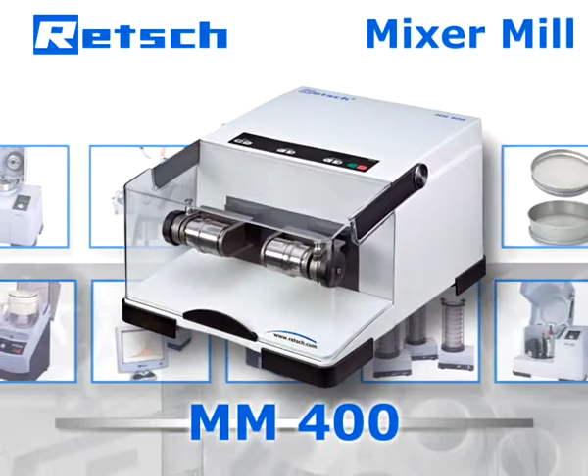Retsch's product philosophy is based on a quote by Aristotle: "The whole is greater than the sum of its parts." Therefore, our R&D department does not simply choose high-quality components, but also pays full attention to the perfection of their interaction. It is this approach which determines Retsch's products to be superior and makes the new Mixer Mill MM 400 the optimal device for the preparation of small quantities.

Due to its universal character, the MM 400 is used for a great variety of applications in biology, chemistry, pharmaceuticals, environment, ceramics, and mineralogy. It performs fine and ultrafine grinding of not only hard, medium-hard, and brittle samples such as alloys, bones, and glass, but also elastic and fibrous ones like plastics and hair. The mill is ideally suited for disrupting biological material for the isolation of DNA and RNA.

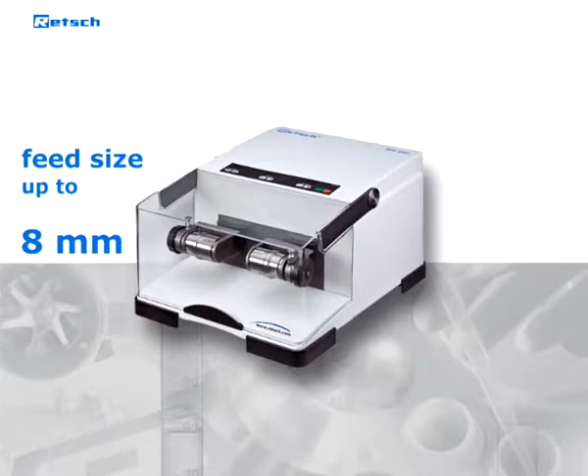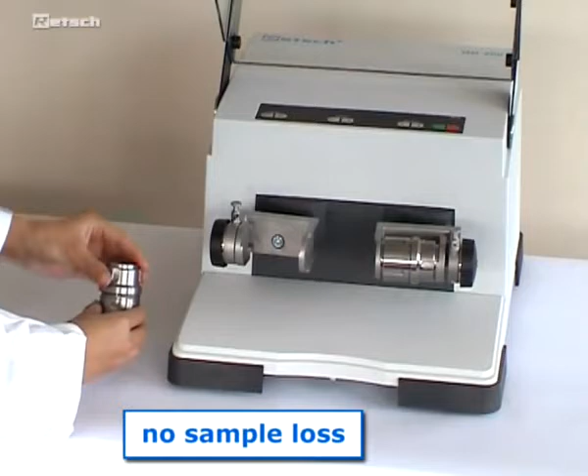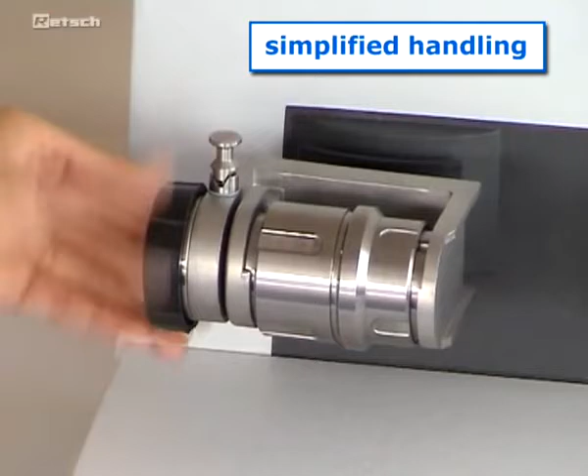With a maximum feed size of up to 8 millimeters, a grind size of down to 5 microns can be realized. The screw-top design of the grinding jars prevents leaks so that even wet comminution can be executed simply and without any sample loss. Defined positioning of the grinding jars in the clamp with automatic centering ensures a maximum degree of reproducibility. The optimized self-locking clamping device simplifies handling of the jars and supports the safety aspect of this device significantly. 2 grinding stations for jars up to 50 milliliters allow high sample throughput.

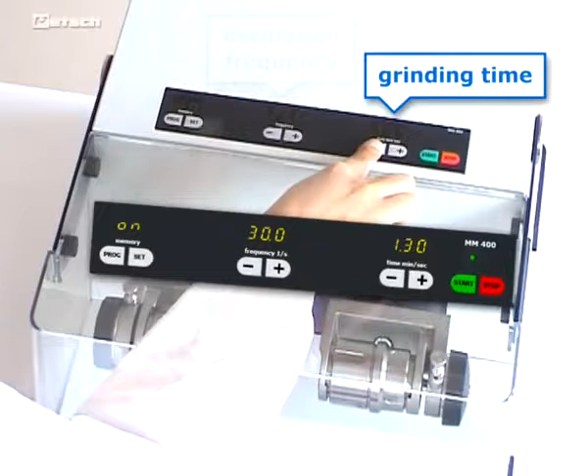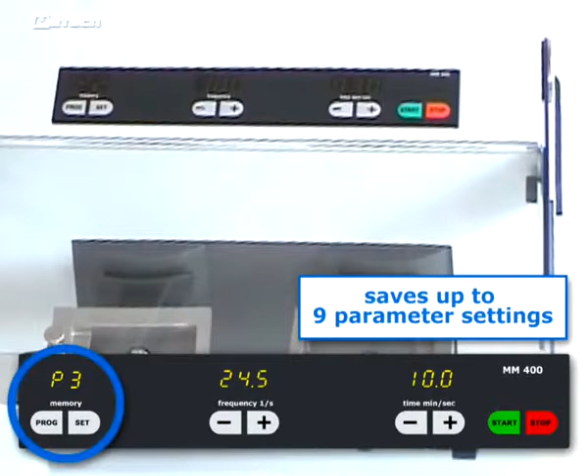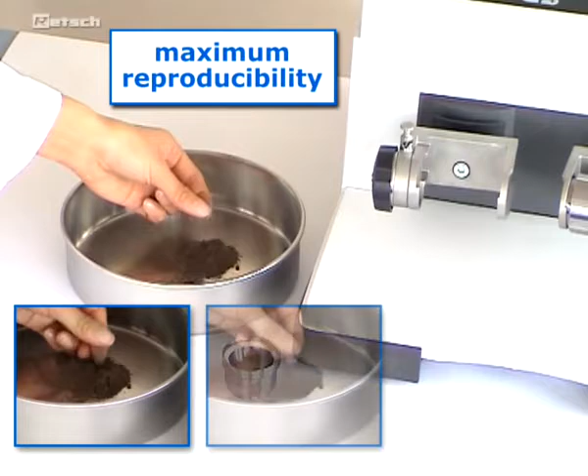The grinding time, as well as the oscillation frequency of up to 30 Hz, can be pre-selected digitally and precisely. An electronic speed control keeps the vibration constant during the entire grinding process. The user has the option to save up to 9 parameter settings, which offer ultimate convenience in routine testing of various samples. During the grinding process, the parameters are then safe from any accidental changes. At the same time, this guarantees maximum reproducibility of the sample preparation process.

After starting the machine, the sample containers perform radial oscillations in a horizontal position. Thus, the material is hit alternately from various sides by the grinding balls. This high-energy impact and friction action makes the Retsch MM 400 one of the most efficient grinders on the market.

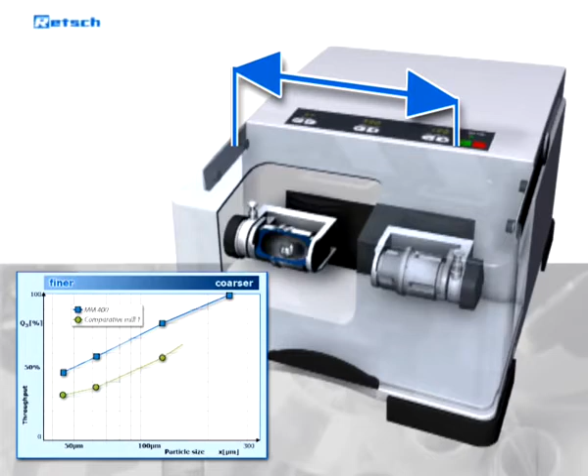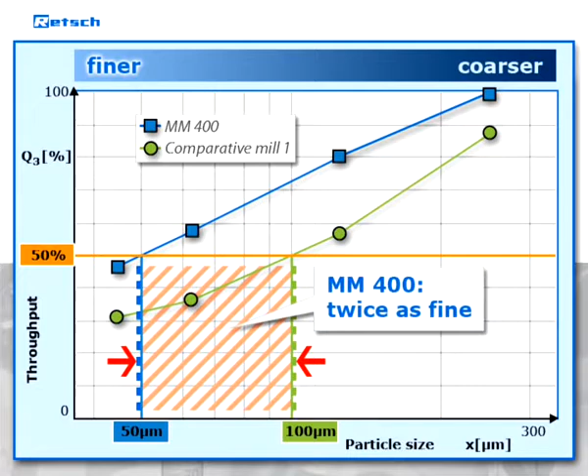Compared to traditional mixer mills, the MM 400 provides an enlarged oscillation radius. On account of this, a significantly higher grinding energy is applied to the sample, which leads to a drastic reduction of the grinding time. Opposing action of the jars ensures stability, even at maximum oscillation intensity. The whole sample is recovered.

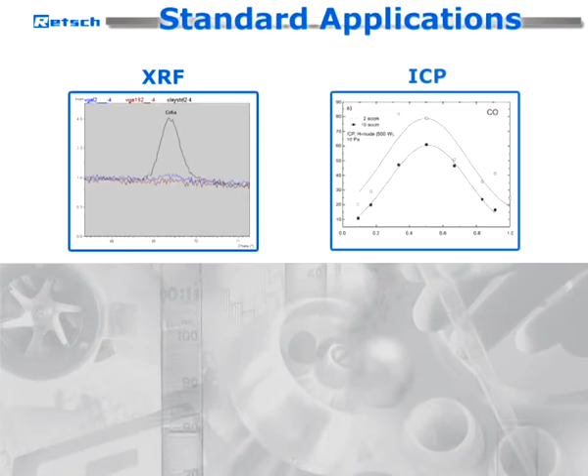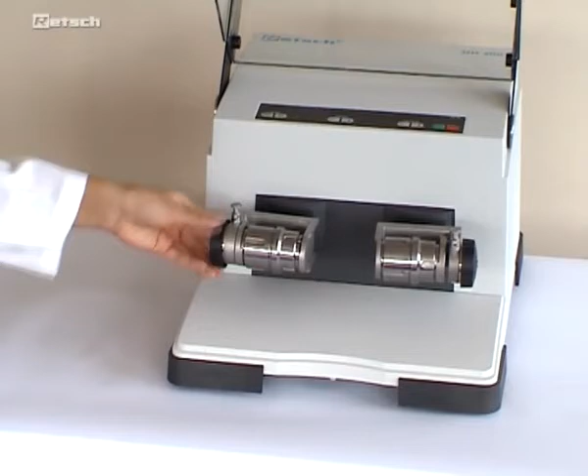Standard applications that the MM 400 is used for are, for example, spectral analyses like XRF, ICP, or AAS. Subsequent pelletizing or fusion is directly possible. The MM 400 is therefore also an economical and ergonomic alternative to the widely used puck and disc mills. Furthermore, this multifunctional device can also be used for wet grinding, cell disruption, and cryogenic grinding.

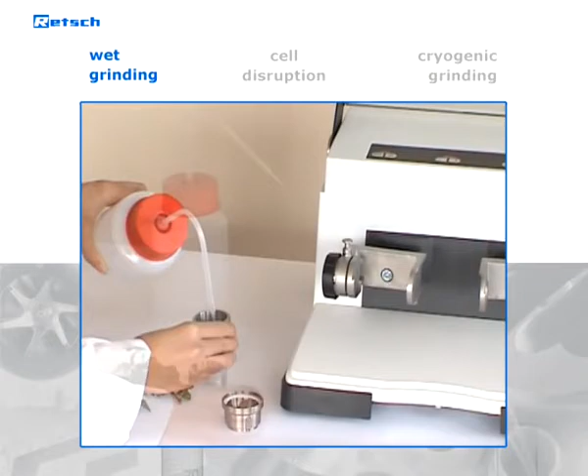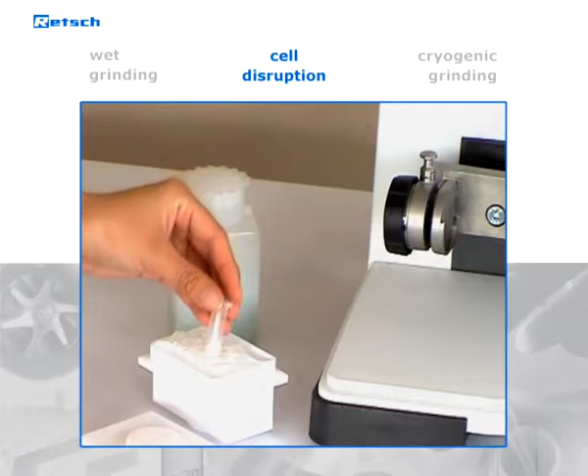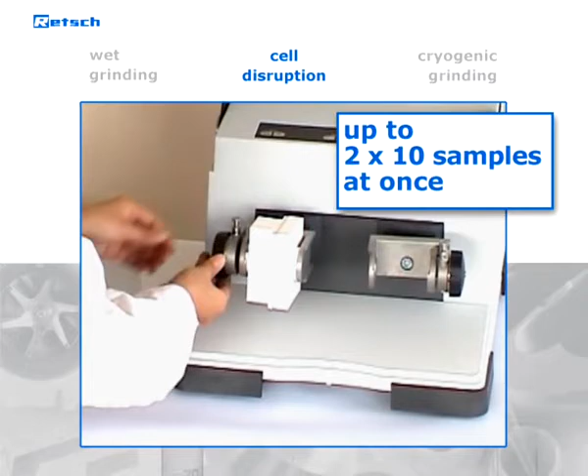The screw-top grinding jars offer an ideal prerequisite for wet grinding. An additional Teflon sealing prevents leakage of liquids and particles. Smaller sample volumes, as commonly used for the isolation of DNA and RNA, are preferably prepared in disposable reaction vials, such as those from Eppendorf. For this purpose, adapter racks are available that hold up to 10 reaction vials. By using grinding media of glass, for instance, cell disruption is effected in an extremely short time, which makes additional cooling unnecessary.

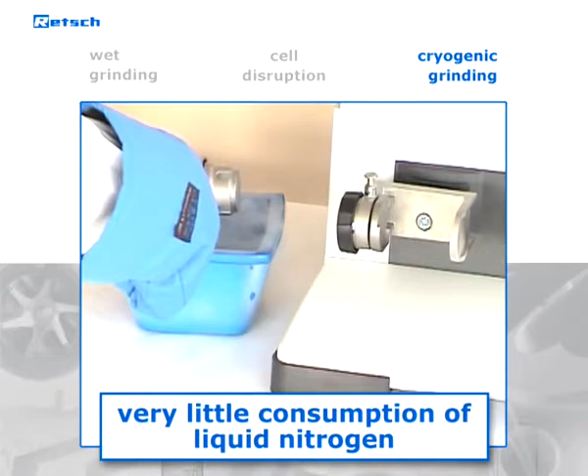Temperature-sensitive and elastic materials can be successfully processed by external cooling of the grinding jars. For this purpose, a special cryo kit consisting of 2 cryo boxes, 2 grinding tongs, and protective spectacles is available. With this equipment, Retsch offers the easiest and most efficient way of grinding the ungrindable, with only little consumption of liquid nitrogen. In contrast to cryogenic grinding conducted by other mills, neither preparative nor continuous cooling are necessary.

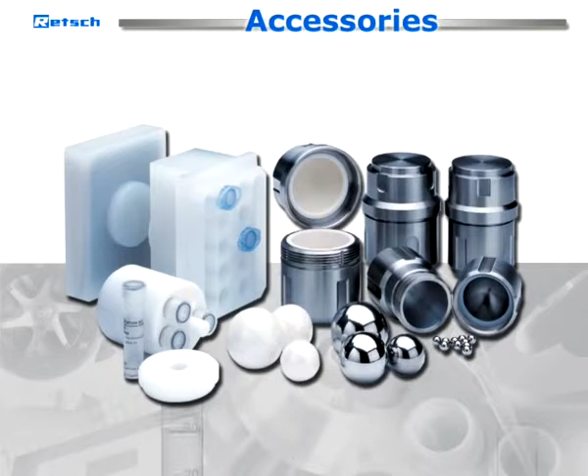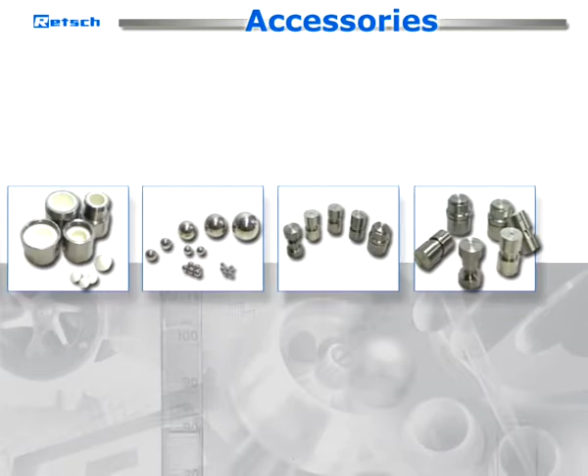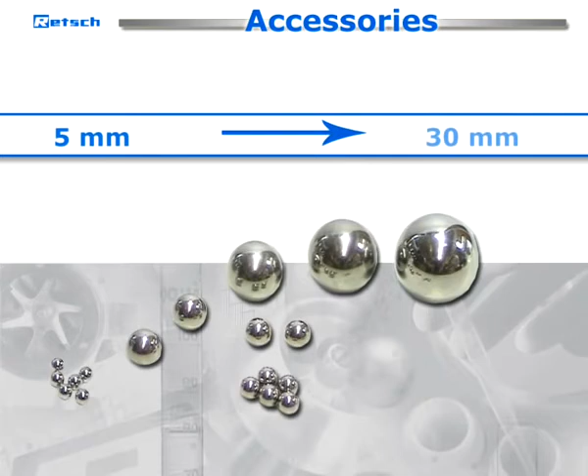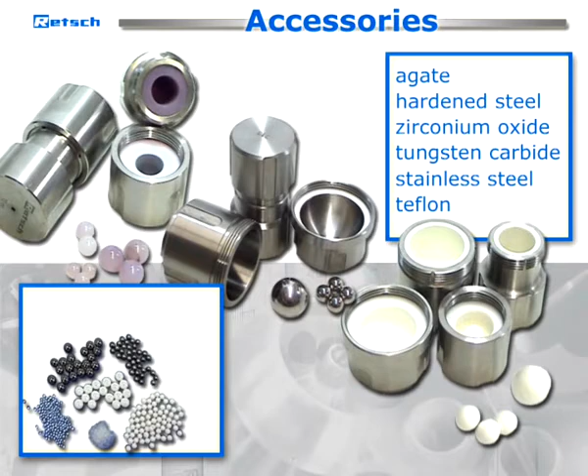The grinding results are greatly influenced by the choice of grinding accessories. Jar volumes and ball charges, as well as their materials, should be selected according to the nature and quantity of the sample to be ground in order to avoid interference with the subsequent analysis. To optimize your specific grinding process, the MM 400 offers an unrivaled variety of jars and balls ranging from 1.5 milliliters to 50 milliliters and from 5 millimeters to 30 millimeters. Both are available in agate, hardened steel, zirconium oxide, tungsten carbide, stainless steel, and Teflon. Grinding balls and glass beads for use in reaction vials are available in sizes from 0.1 millimeters to 5 millimeters.

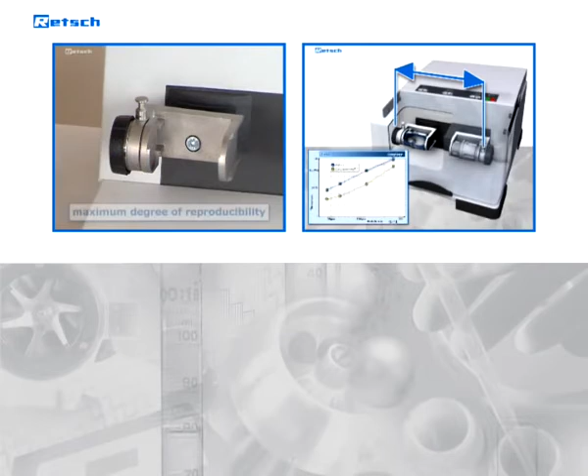A huge amount of unique features determine the superiority of the new MM 400. The convenient benchtop unit is the ideal grinder to prepare small sample volumes. Our Mixer Mill MM 400 is an easy-to-use, universal, and at the same time powerful tool to conduct perfect sample preparation. It is the optimal solution to get reliable and reproducible results for your grinding, mixing, homogenizing, and cell disruption process.